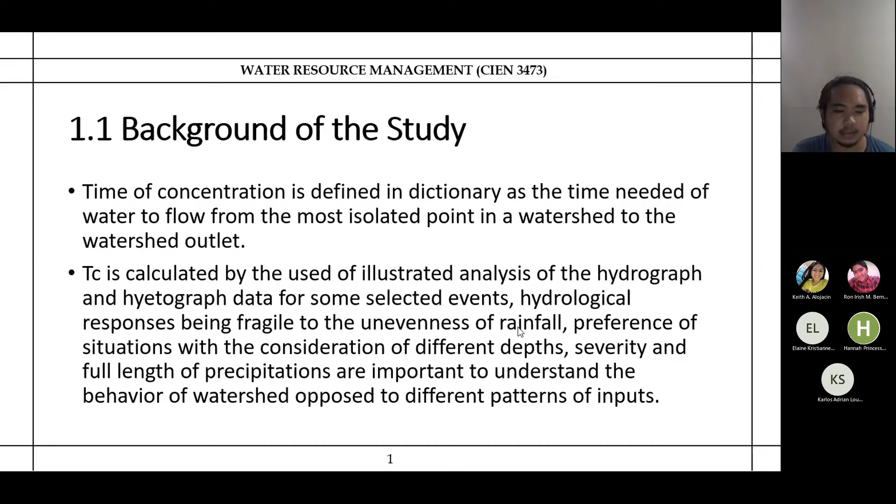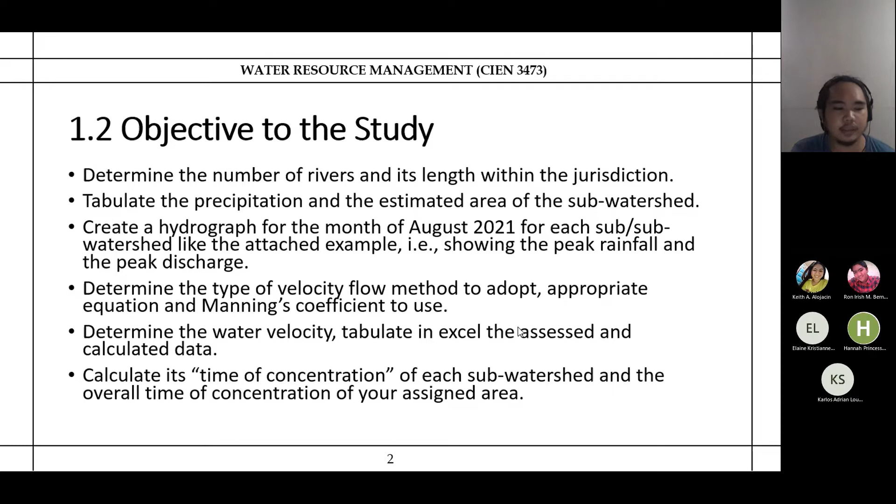Objective of the study. Determine the number of rivers and its lengths within the jurisdiction. Tabulate the precipitation and estimated area of the sub-watershed. Create a hydrograph for the month of August 2021 for each sub-watershed like the attached examples. Determine the types of velocity, flow method to adopt, appropriate equation, and Manning's coefficient to use. Determine the water velocity, tabulate in Excel the assessed and calculated data. Calculate the time of concentration of each sub-watershed and the overall time of concentration of your assigned area.

Next presenter, Velosan.

Scope and limitation of study. The following study covers three sub-basins of Laguna Lake watershed, which are Pila, San Juan, and Caliraya in the province of Laguna. The time of concentration was calculated from the 2-year period starting from September 2019 up to August 2021. This study will provide insights for the time required for water to flow from the most distant point in a watershed to the watershed outlet. This will be a great help to the residents in the locality to be aware and to safeguard themselves for the possible occurrence of flooding in the lowland areas.

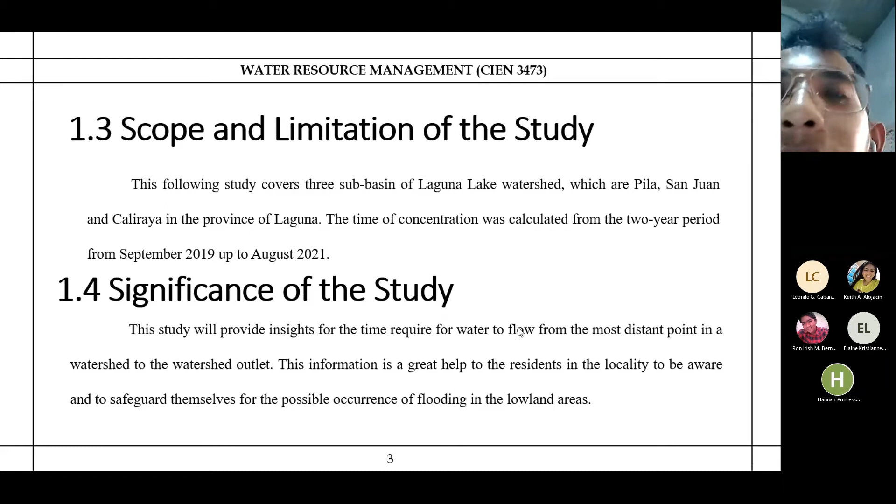Chapter 2. For Chapter 2, we were assigned to study Pila, San Juan, and Caliraya. Pila Sub-Basin is located in the southeastern part of the Laguna Bay Basin. It consists of 60 barangays in 6 municipalities, namely Pila, Victoria, Nagcarlan, Santa Cruz, Calauan, and Liliw. The Pila Sub-Basin has an area of 27.37 square kilometers and 21.93 kilometer perimeter.

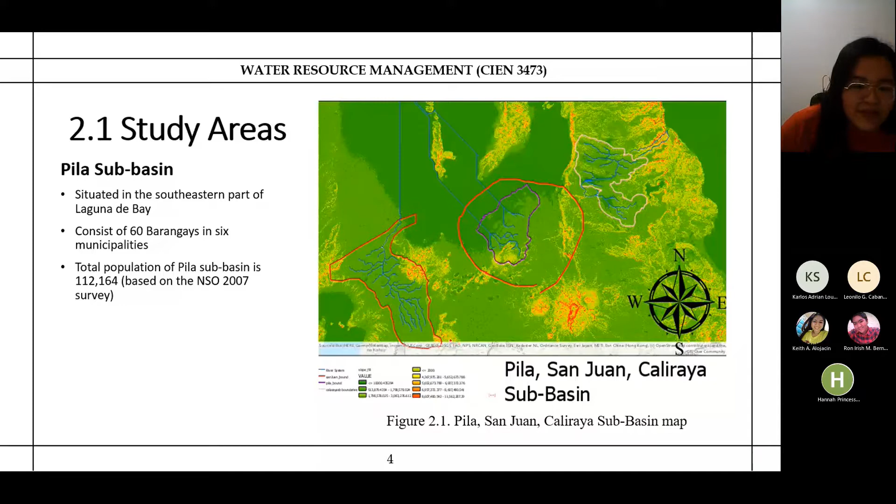The total population in Pila Sub-Basin based on the National Statistics Office survey in 2007 is 112,164. Most of the population come from the municipality of Pila with about 39% of its total population, Victoria with 29%, Santa Cruz with 25%, Nagcarlan with 6%, Liliw with 0.23%, and Calauan with 0.07%. Next slide, please.

San Juan Sub-Basin. San Juan Sub-Basin is located at the southwestern portion of the Laguna de Bay. The sub-basin covers the barangays of 2 municipalities and 3 cities, namely Municipality of Santo Tomas, Municipality of Malvar, Calamba City, Tanauan City, and Lipa City. The city of Tanauan and Santo Tomas have the largest land area within the sub-basin, while Malvar has the least. However, in terms of number of barangays covered by the sub-basin, Santo Tomas has the greatest proportion with 100%, followed by Calamba City 90.74%, Tanauan City 58.33%, Malvar 40%, and Lipa City 4.17%.

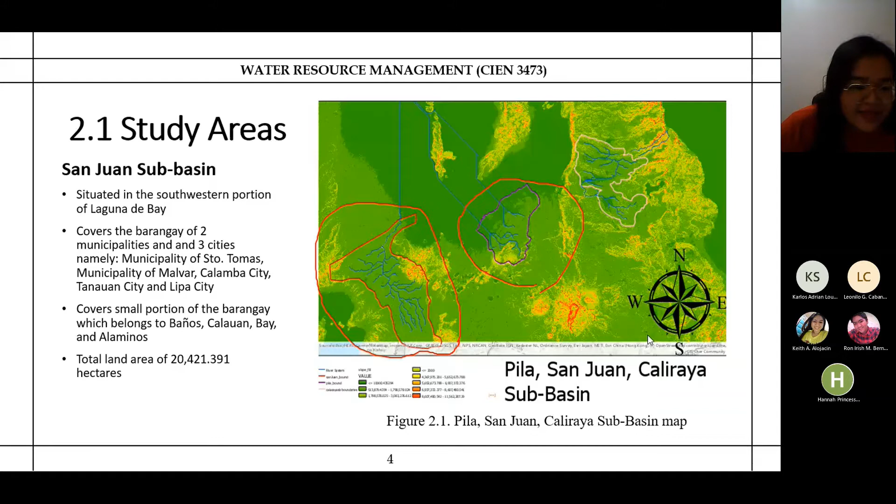Based on the 2007 census of population by the National Statistics Office, the total population within the San Juan sub-basin is estimated at 376,555. Tanauan City, having the largest area percentage making up the sub-basin, also shares the highest number of inhabitants with 38%. On the other hand, Los Baños contributes the least number of population at 0.39%. Next slide, please.

Caliraya Sub-Basin. The Caliraya Sub-Basin is located at the southeastern part of Laguna de Bay Basin and about 105 kilometers southeast of Metro Manila. It is bounded by the Paete Sub-Basin in the east, Pagsanhan Sub-Basin in the west, the East Bay of Laguna Lake to the north, and Mount Banahaw to the south. 6 municipalities coming from 2 provinces are located within the sub-basin, namely Cavinti, Kalayaan, Lumban, and Paete in the province of Laguna, and Mauban and Sampaloc in Quezon Province.

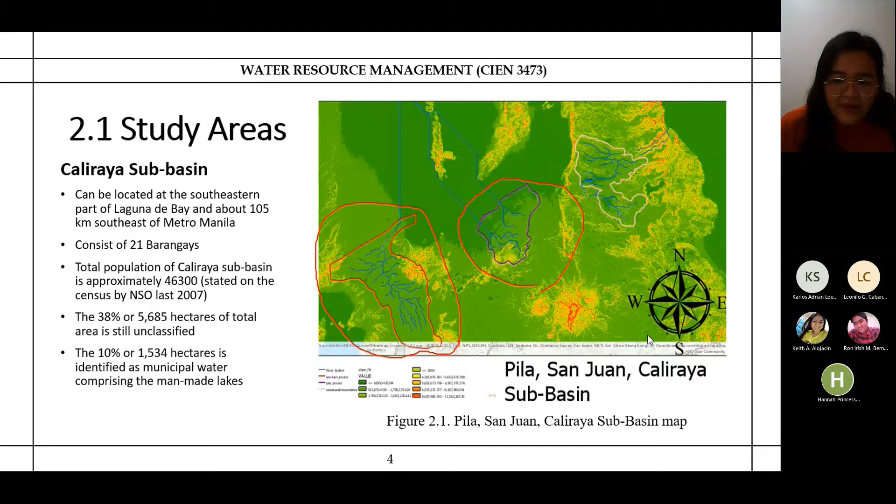The 38% or 5,685 hectares of total area is still unclassified. The 10% or 1,534 hectares is identified as municipal water comprising the man-made lakes. The whole sub-basin has an aggregate area of 13,526.21 hectares. Next.

To analyze and identify the number of rivers and the length of Laguna Lake watershed, we used ArcGIS. Through the ArcGIS watershed analysis drainage command, all the depicted lowest elevations were considered as rivers and streams.

For the gathering of rainfall data, the amount of precipitation was obtained from the World Weather Online from September 2019 up to August 2021. The 2-year period rainfall data was considered for the calculation of time of concentration in the different river basins. This study only considered the August 2021 daily rainfall data for the plotting of the hydrograph.

Next presenter, please.

Thank you, Ms. Elaine. For the predicted surface runoff and hydrograph, the predicted volume was obtained following the equations developed by USDA-SCS 1972. These are the equations for predicting the volume of total runoff of the rainfall excess, or the volume runoff. For equation 1, Q is equal to (P minus IA) squared divided by

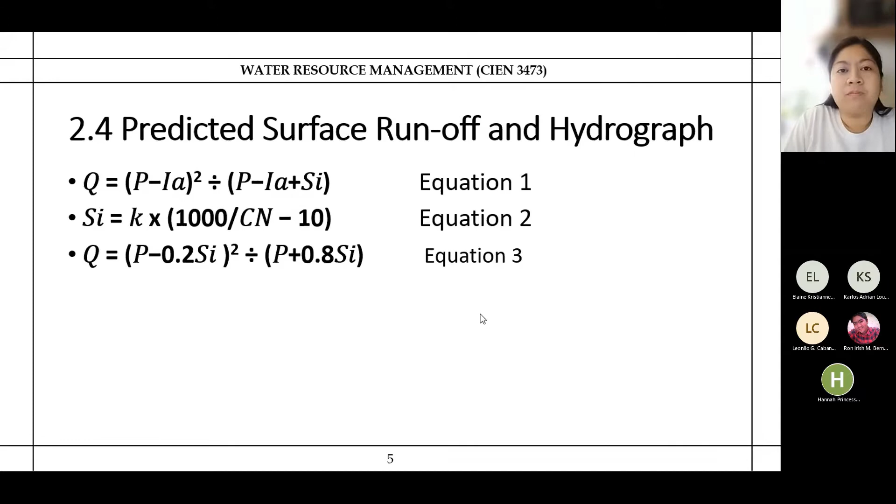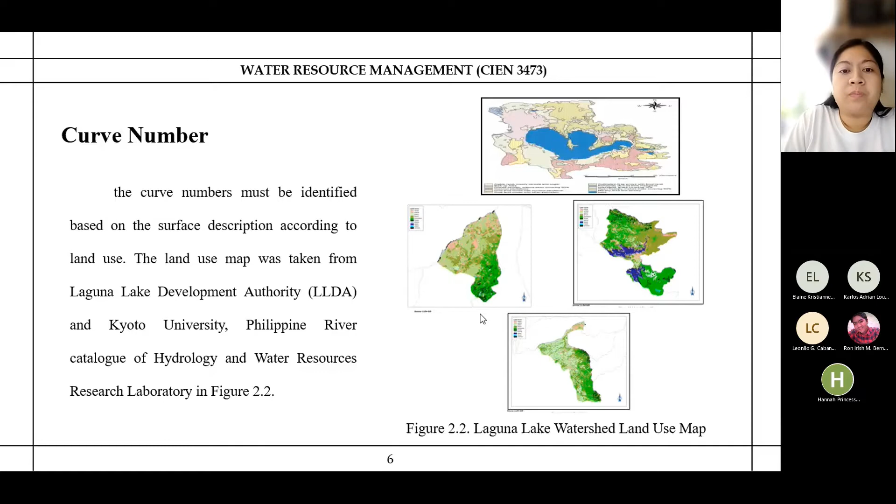Next. Okay. Here in Table 3.4, we can see the curve numbers according to land use of Pila, San Juan, and Caliraya. And we use the composite, and the data we obtained for the composite for Pila is 72.33, for Caliraya is 78.25, and for San Juan is 83.75. Next.

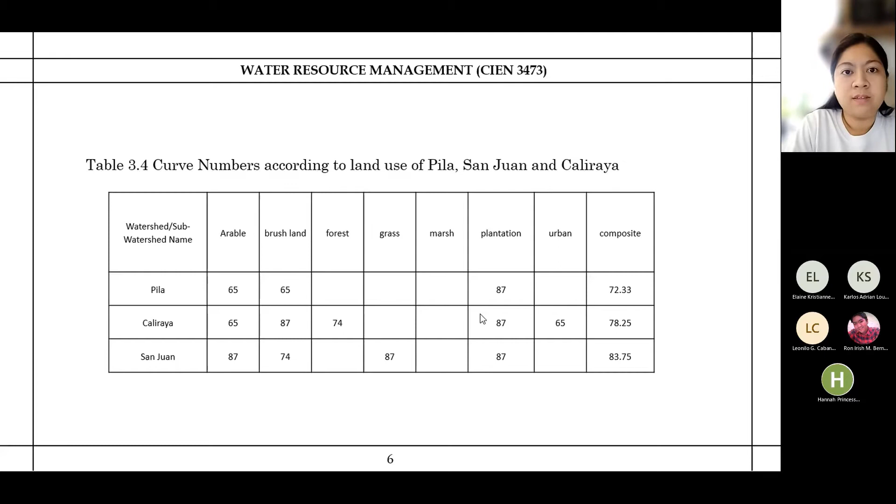In 2.5, the determination of water velocity for shallow concentrated and open channel flow, the velocity method assumes that time of concentration is the sum of travel times for segments along the hydraulically most distant flow path, as represented in equation 4, which is TC is equal to Tt1 plus Tt2, and so on, where TC is the time of concentration and Ttn is the travel time of a segment. N is the number of segments comprising the total hydraulic length in the velocity method.

Sheet flow usually occurs in the headwaters of a stream near the ridge line that defines the watershed boundary. Typically, sheet flow occurs for no more than 100 feet before transitioning to shallow concentrated flow. Which, pakibalik po.

Which Tt is equal to 0.007 for equation 5, where Tt is the travel time and n is the Manning roughness coefficient, L is the sheet flow length, P2 is the 2-year 24-hour rainfall, and S is the slope of land surface. Next po.

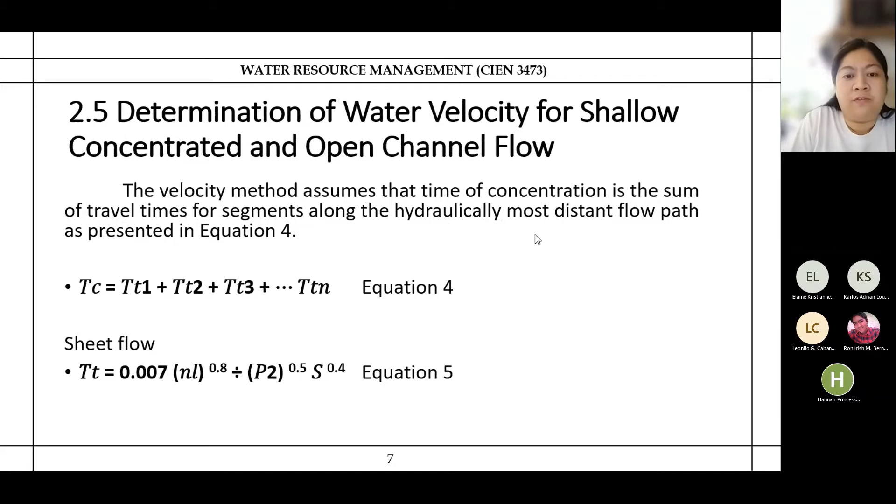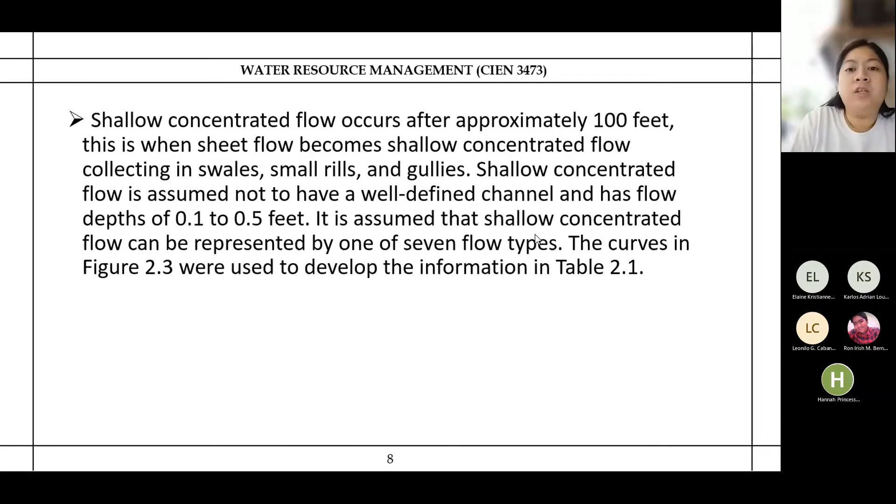Shallow concentrated flow occurs after approximately 100 feet. This is when sheet flow becomes shallow concentrated flow, collecting in swales, small rills, and gullies. Shallow concentrated flow is assumed not to have a well-defined channel and has flow depths of 0.1 to 0.5 feet. It is assumed that shallow concentrated flow can be represented by one of 7 flow types. The curves in figure 2.3 were used to develop the information in table 2.1.

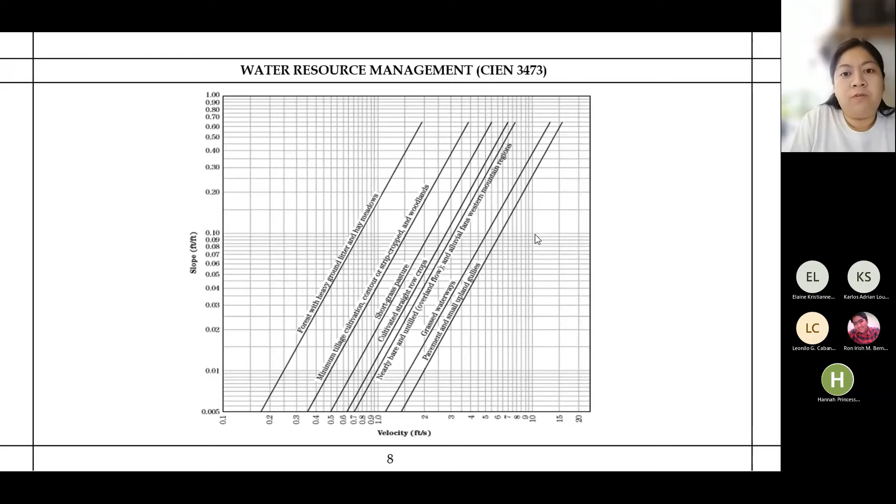Next po. This is figure 2.3, which is velocity versus slope for shallow concentrated flow. Next po. And this is table 2.1, equations and assumptions developed from figure 2.3. Next po.

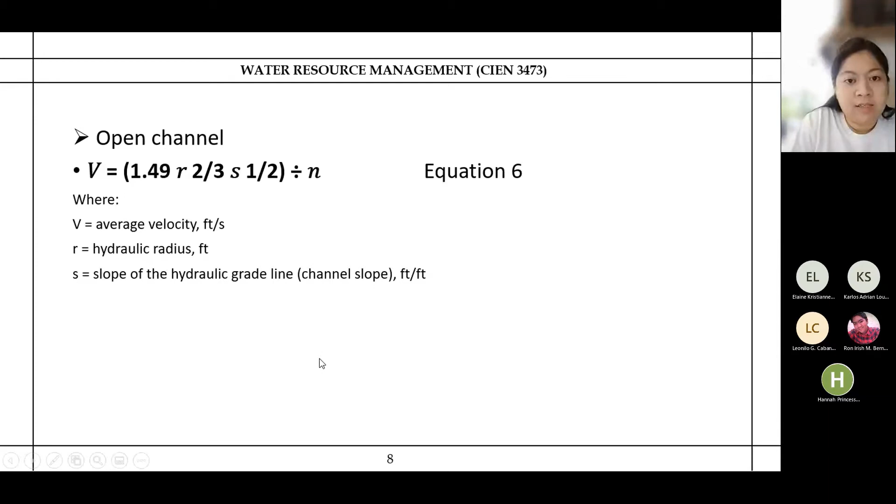For the open channel, the Manning's equation or water surface profile information can be used to estimate average flow velocity. Average flow velocity is usually determined for the bank full elevation using equation 6, which is V = 1.49 R^(2/3) S^(1/2) / n, where V is average velocity, R is hydraulic radius, and S is slope of the hydraulic grade line. Next, po.

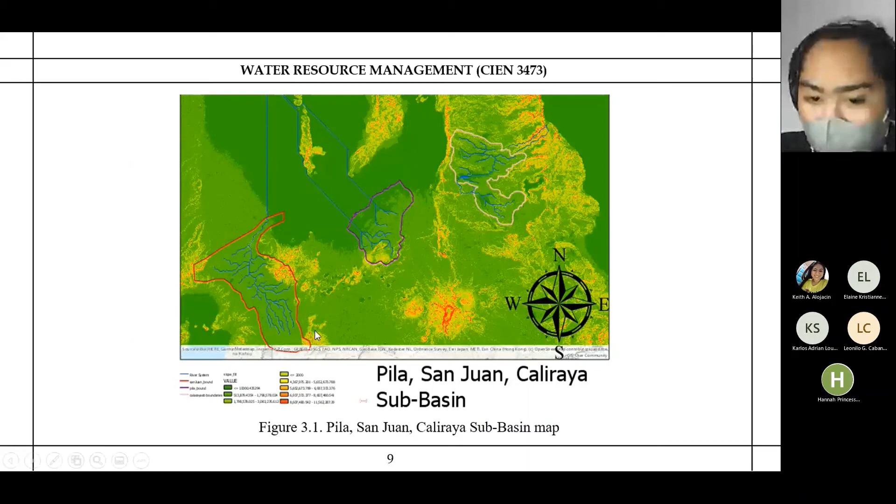Chapter 3, Result and Discussion. 3.1, Pila, San Juan, and Caliraya Watershed Area. Using ArcGIS flow, the drainage from the digital elevation model was obtained and shown in the figure. The rivers and other streams were determined using the watershed flow line analysis in the table. Based on the ArcGIS watershed area analysis, Pila, San Juan, and Caliraya have one major river each. Their watershed areas are 63,692,290.79 square meters, 173,230,313.3 square meters, and 128,898,581.3 square meters, respectively. Here are the Pila, Caliraya, and San Juan sub-basin maps.

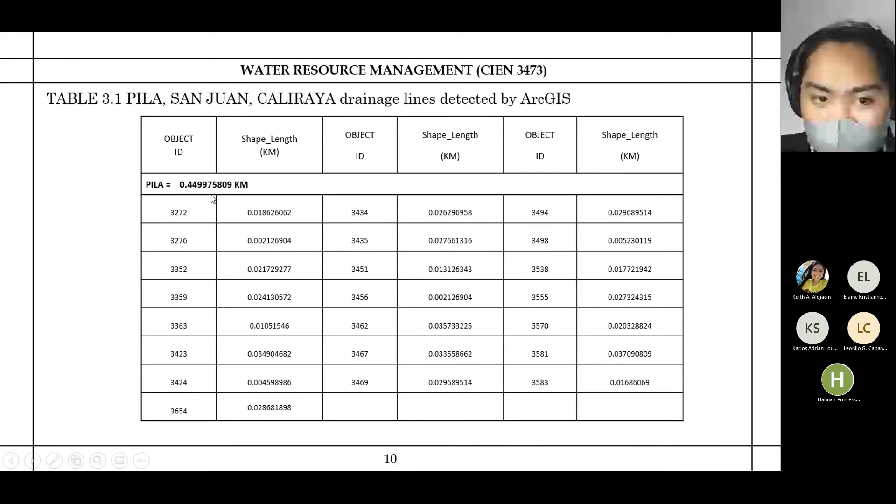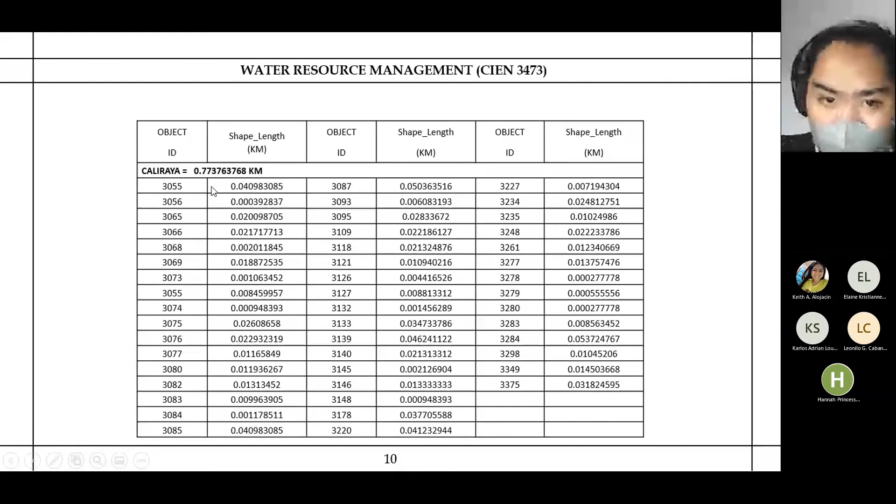Table 3.1. This table represents the lines detected by ArcGIS. Pila has a total of 0.449975809 kilometers. This is for Caliraya, which has a total of 0.773763768 kilometers. And this is for San Juan; it has a total of 1.2 kilometers. There were a total of 176 drainage lines detected in Pila, San Juan, and Caliraya, as shown in figure 2.1.

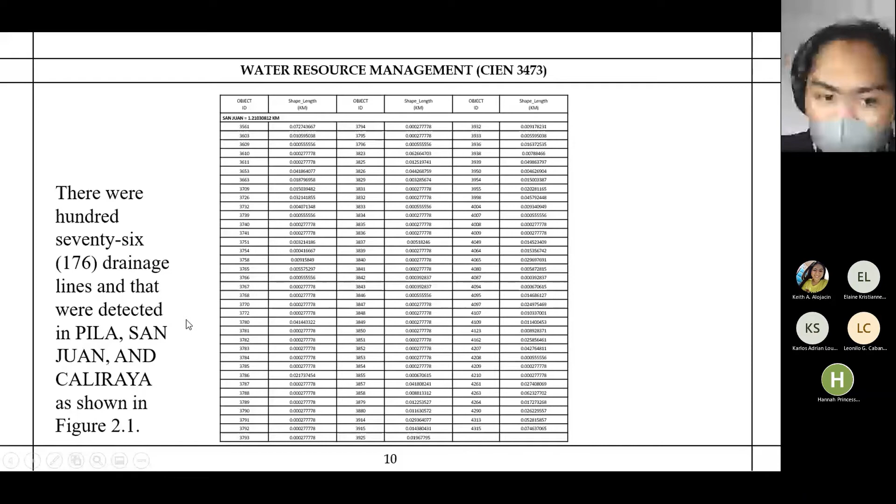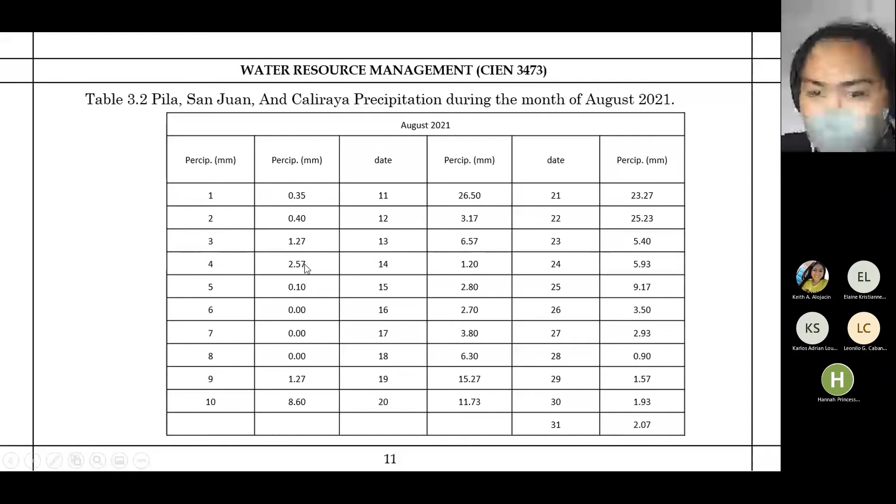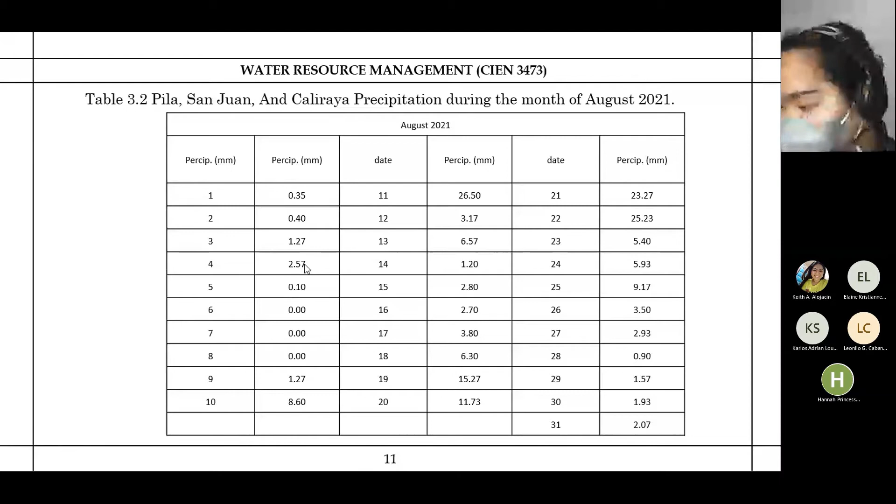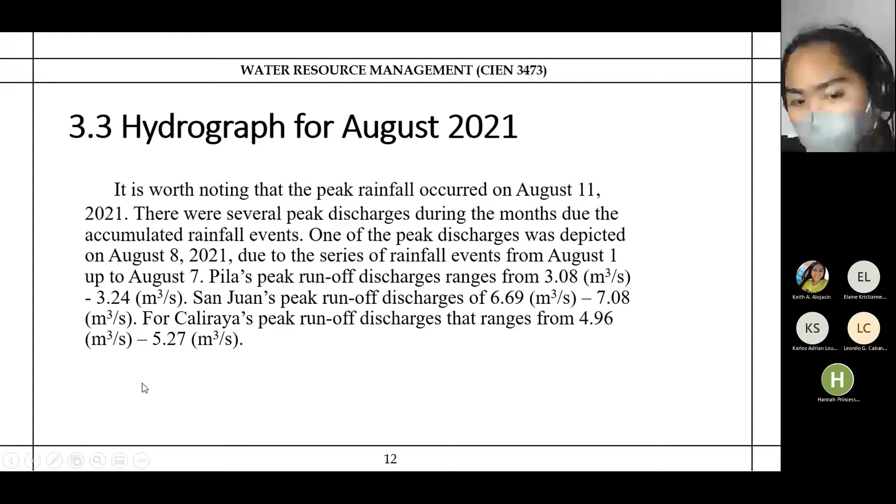Here's the hydrograph of August 2021. Due to series of rainfall events from August 1 to August 7, Pila recorded peak discharge from 3.08 cubic meters per second to 3.24 cubic meters per second. San Juan has 6.69 cubic meters to 7.08 cubic meters. Caliraya has peak runoff discharge from 4.96 to 5.27 cubic meters per second. Here's the hydrograph for the August 2021 rainfall.

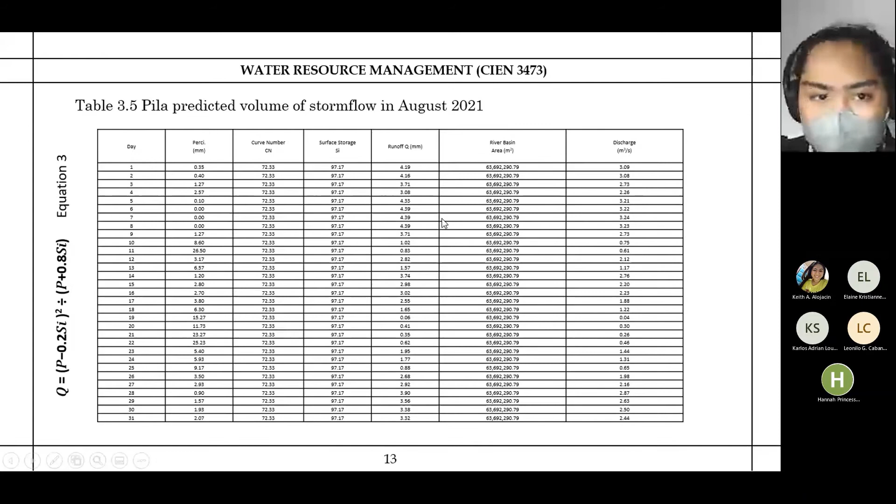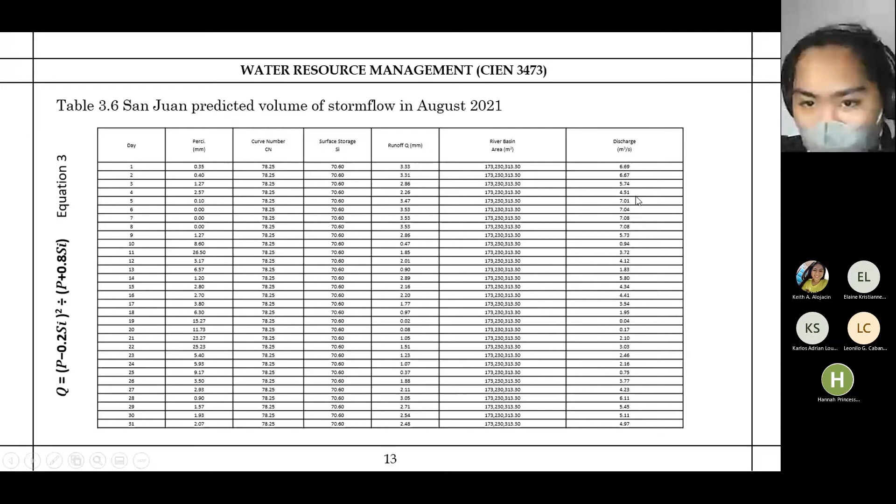Pila predicted volume of storm flow in August 2021. The runoff was obtained using equation 3. Here's the data for Pila. Here is the data for the San Juan storm flow. The CN was given in the previous table discussed in chapter 2. For the precipitation obtained from World Weather Online, the surface storage was computed using the SI equation. The runoff was computed using equation 3, with the river basin obtained from ArcGIS, and the discharge was computed. The same procedure has been done for the Caliraya volume of storm flow in August 2021.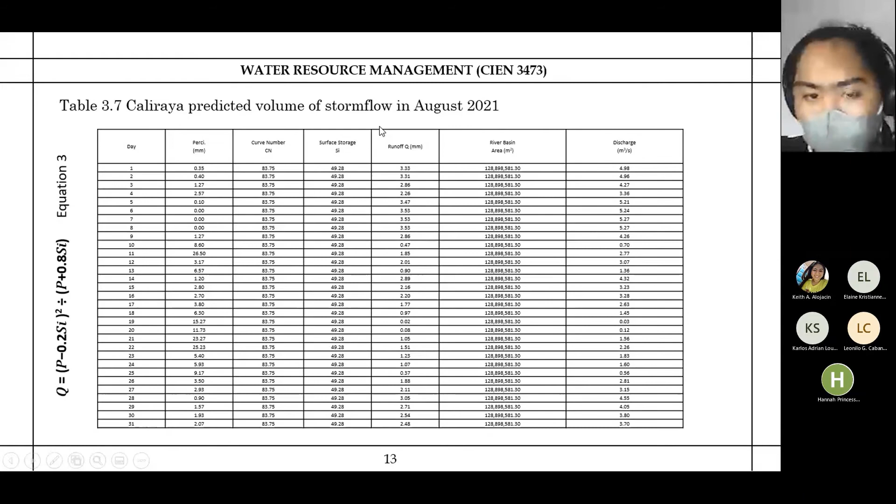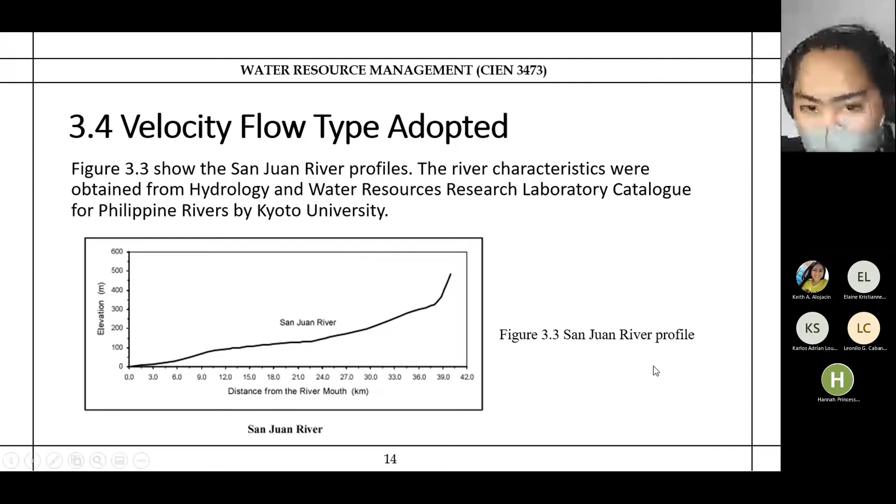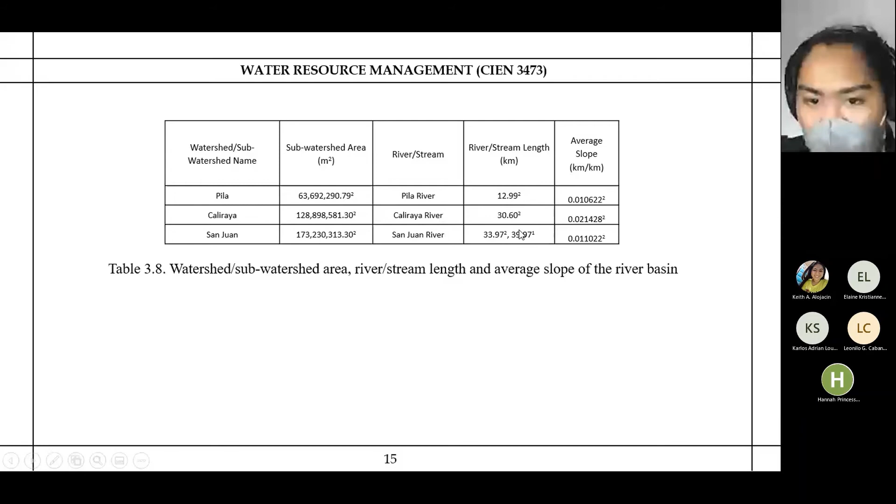Velocity flow type adopted. Figure 3.3 shows the San Juan River profile. The river characteristics were obtained from the Hydrology Water Research Catalog from Kyoto University. This is the San Juan River profile, figure 3. Table 3.8, watershed, river length, and average slope of the river basin obtained from ArcGIS. Watershed area obtained for Pila, Caliraya, and San Juan. They obtained the river length from ArcGIS, and this one is obtained from Kyoto University, while this one is obtained also.

Table 3.9 shows the shallow concentrated flow for the Pila, Caliraya, and San Juan subbasins. Pila has this average slope and surface description of cultivated straight row crops, using the velocity equation V equals 8.762 times the slope raised to 0.5, which gives us a value of 0.9.

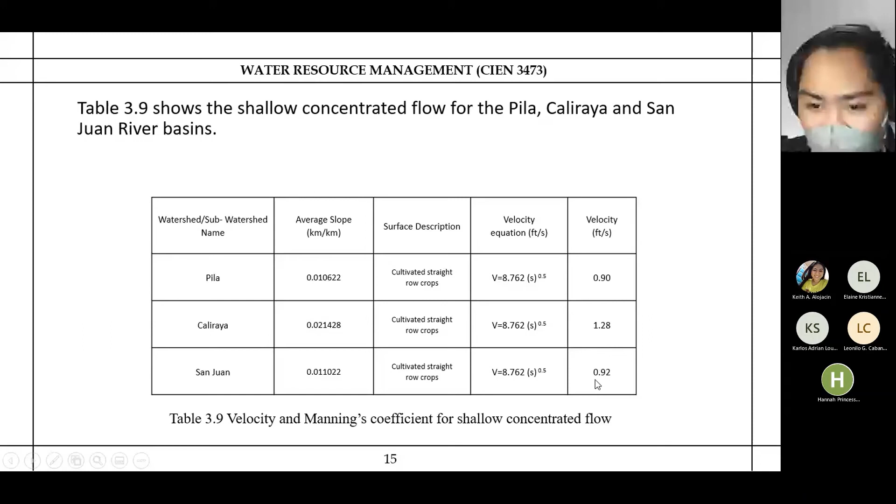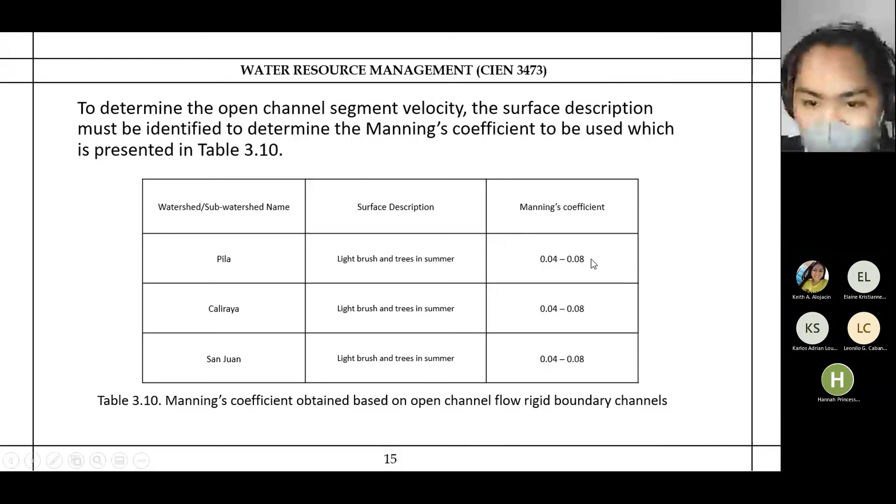The same equation was used for Caliraya and San Juan, giving 1.28 and 0.92 respectively. To determine the open channel segment velocity, the surface description must be identified to determine the Manning coefficient to be used, presented in table 3.10. Pila, Caliraya, and San Juan have light brush and trees in summer, prompting the researchers to use a 0.04 to 0.08 Manning coefficient.

Time of concentration: to determine the different times of concentration according to the flow segment, each parameter for the specific flow segment must be identified. For instance, sheet flow, slope, and Manning coefficient were determined as shown in table 3.11. Table 3.12 represents the time of concentration of the three river subbasins, calculated based on equation 5.

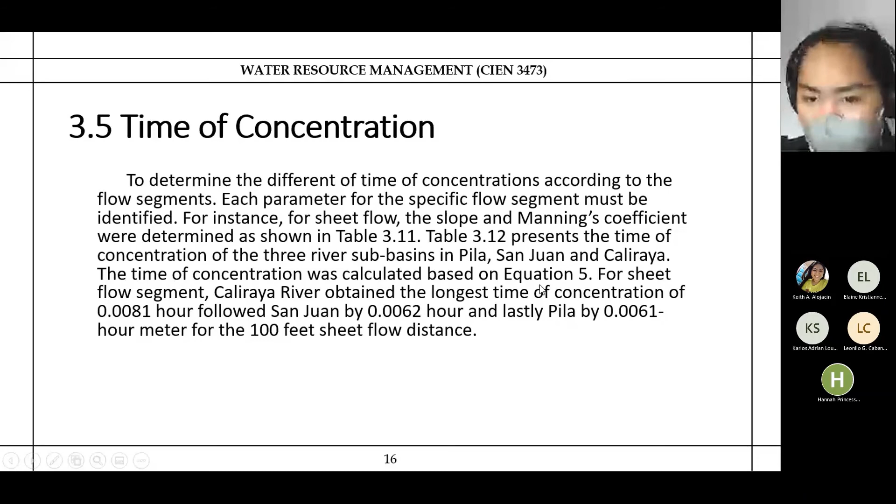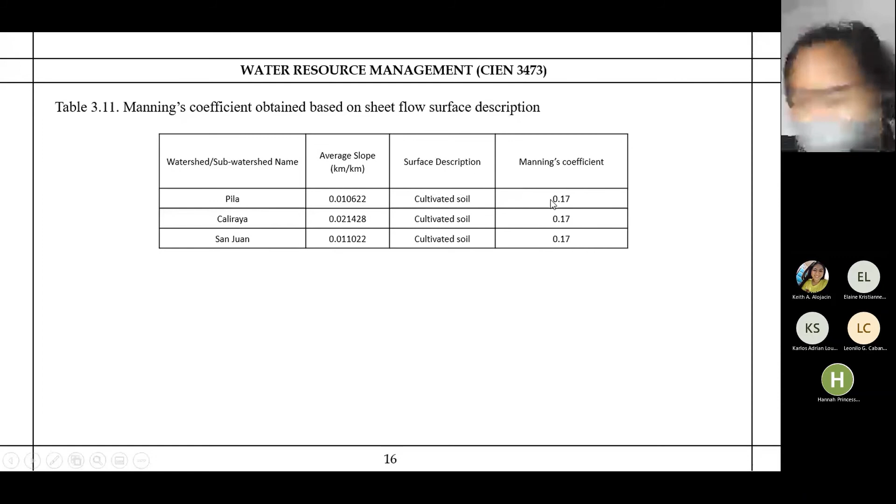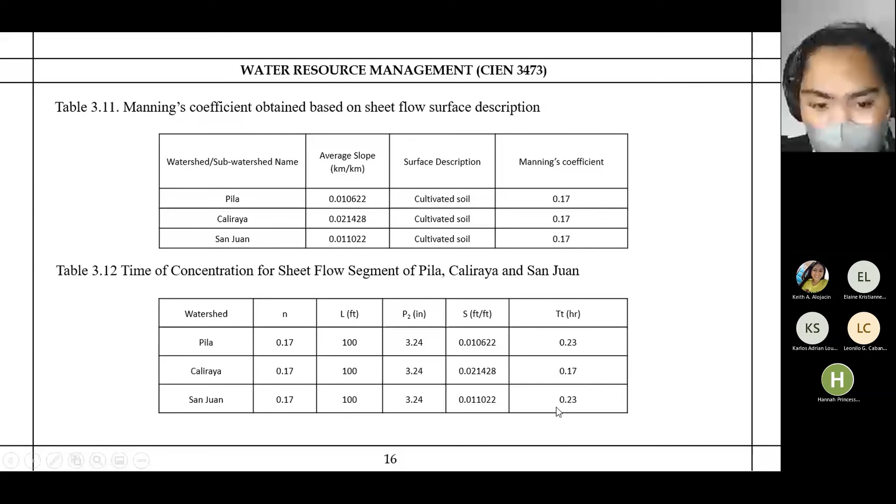The Manning coefficient was obtained based on the sheet flow description in table 3.11, with a value of 0.17. Table 3.12 shows the time of concentration for the sheet flow segment of Pila, Caliraya, and San Juan. Using the equation, we obtained time of concentration values of 0.23 hour, 0.17 hour, and 0.23 hour for Pila, Caliraya, and San Juan respectively.

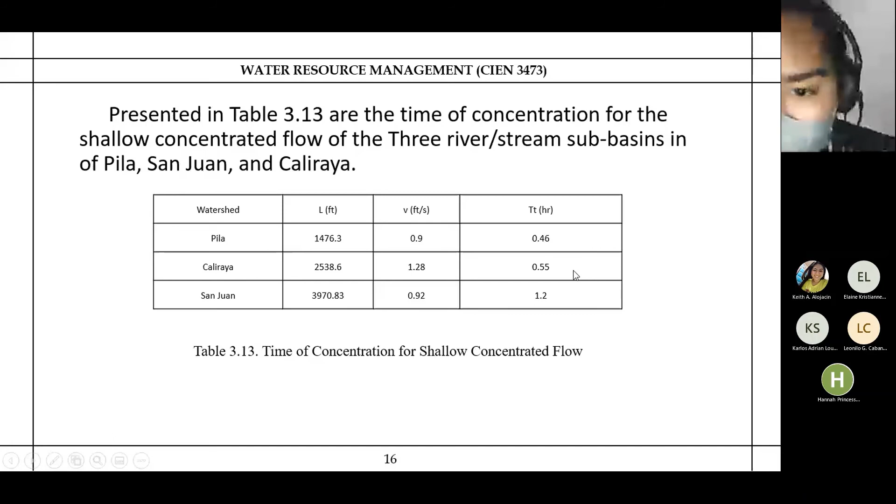Table 3.14 shows the travel time in the channel flow of Pila, San Juan, and Caliraya. Pila obtained a total travel time of 2.03 hours, Caliraya has 3.42 hours, and San Juan has 4.49 hours.

Table 3.15 shows the time of concentration of Pila, Caliraya, and San Juan, where we summarize the sheet flow, concentrated flow, and open channel flow time of concentration. We were able to get 2.72 for Pila, 4.14 for Caliraya, and 5.92 for San Juan.

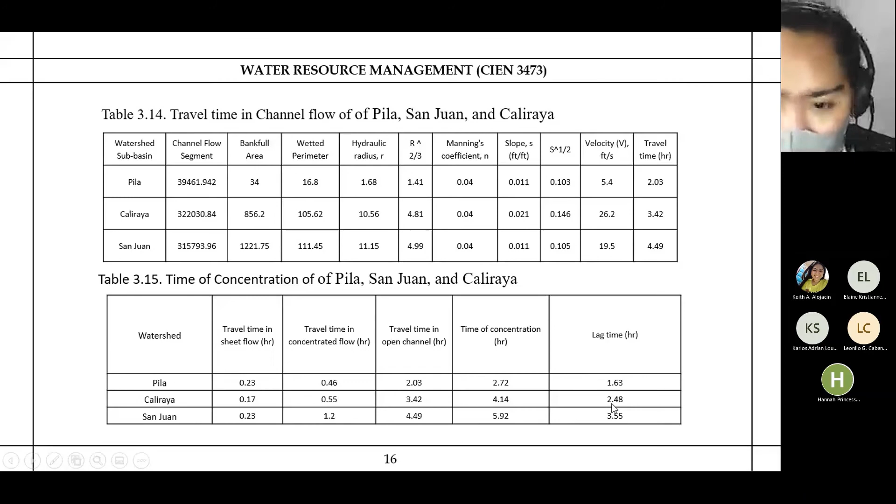Multiplying by 0.6, we were able to get the lag time, which is 1.63 for Pila, 2.48 hours for Caliraya, and 3.55 hours for San Juan.

Time of concentration is determined by the different responses of a watershed using the velocity method for the three municipalities of the Laguna Lake watershed subbasins, namely Pila, San Juan, and Caliraya.

The following are the analysis and conclusions we obtained from the data collected. Based on the ArcGIS watershed area analysis, Pila has a watershed area of 63,692,290.79 square meters, San Juan has 173,230,313.3 square meters, and Caliraya's watershed area has 128,898,581.3 square meters.

According to the hydrograph result shown in figure 3.2, depicted on August 8, 2021, Pila's peak runoff discharge ranges from 3.08 to 3.24 cubic meters per second. San Juan's peak runoff discharge ranges from 6.69 to 7.08 cubic meters per second, and Caliraya's peak runoff discharge ranges from 4.96 to 5.27 cubic meters per second.

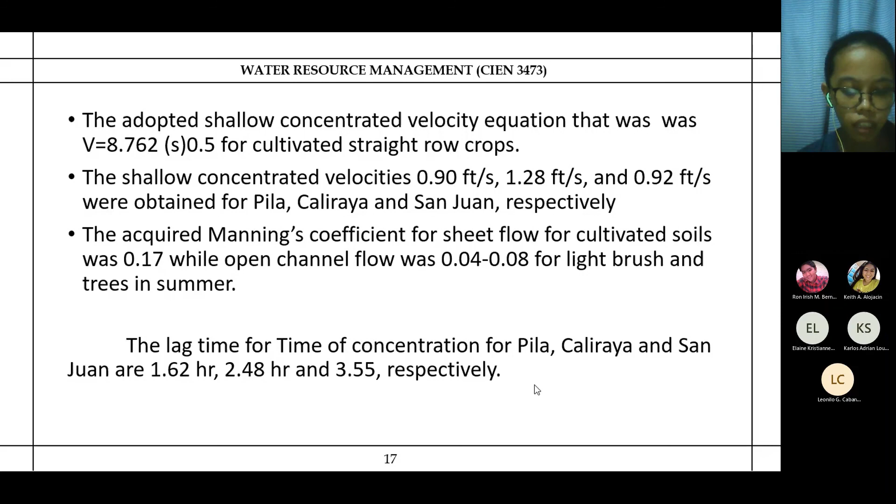Shallow concentrated velocities obtained for Pila is 0.90 feet per second, Caliraya has 1.28 feet per second, and San Juan has 0.92 feet per second. The calculated lag time for Pila is 1.62 hour, for Caliraya is 2.48 hour, and for San Juan is 3.55 hour.

Here are the references of our group that we used to obtain information throughout this research paper or group project.